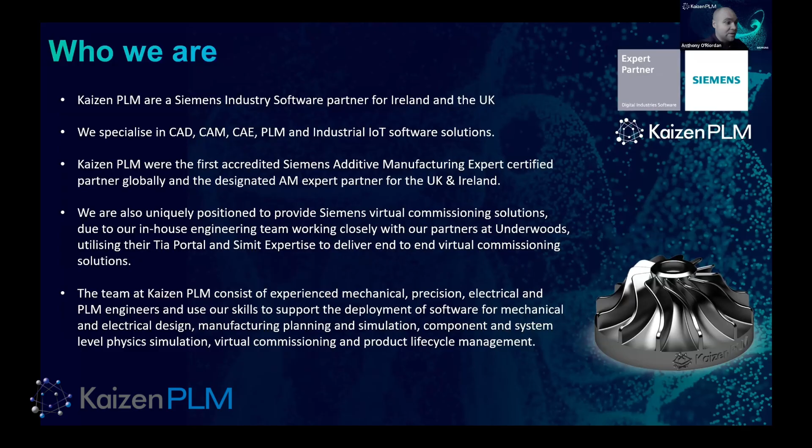So Kaizen PLM, we're a Siemens industry software partner founded in Ireland 8 years ago. We sell and support a range of CAD, CAM, 3D simulation, PLM, and industrial IoT software solutions. So almost any type of software that an engineering company would need. And while we specialize in a few key areas such as additive manufacturing and virtual commissioning, we were actually the first accredited expert partner of Siemens globally for additive design, simulation, and manufacturing software. And we often work with Siemens in their direct accounts to support those additive design and manufacturing software deployments. We are all mainly engineers at Kaizen, and we use these software tools day in and day out.

So just to give you a quick overview of what we will cover today, we are going to start the webinar by giving you a very quick overview of our digital engineering workflows, and then I will jump into some quick real-life examples of part lightweighting. Jay from IMR will then take you through a landing gear torque link design, which Kaizen PLM recently provided to IMR. This was actually printed by IMR on their Renishaw powder bed fusion system. And we're definitely saving the best for last, as Rodrigo Fraga from Siemens will be delivering a story on topology optimized robot grippers, which Siemens have recently commissioned, and they're gaining some popularity in industry as well.

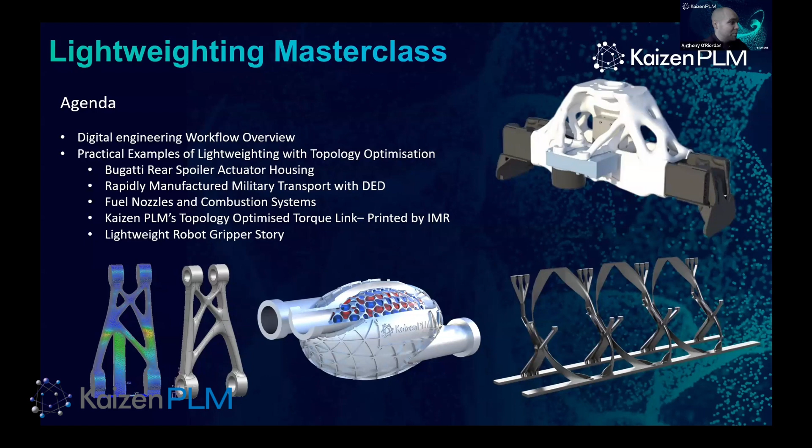So what are the barriers really to industrializing additive manufacturing and digital lightweighting technologies? As we talk with companies across industry, one barrier to industrializing additive manufacturing or digital lightweighting is the reliance upon point solutions for much of their design and manufacturing process.

This becomes a problem because the use of multiple software systems from multiple vendors means reliance upon neutral file formats that don't contain any intelligence. This disconnected process chain means that the final workflow from design to manufacturing is almost untraceable, and it makes it difficult to certify the products manufactured. It is very difficult to ensure that the proper data is being transferred between each step of the workflow when that data isn't tightly managed in a single system.

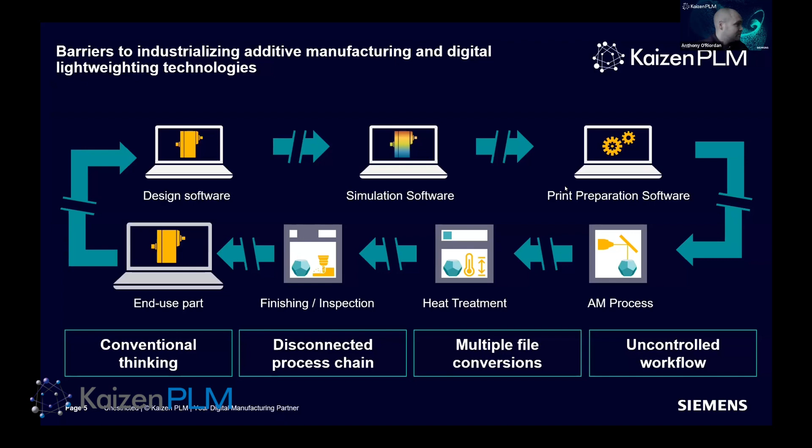To truly get the best return on investment from additive manufacturing or any digital engineering workflow, the design, manufacturing, and quality processes must be part of a holistic digital manufacturing workflow. Such a workflow allows for design data to be simulated, prepared, printed, machined, inspected, and quality controlled, all within the same software system. This is the type of solution Siemens and Kaizen work on, and the type of solution that we deliver to our customer base.

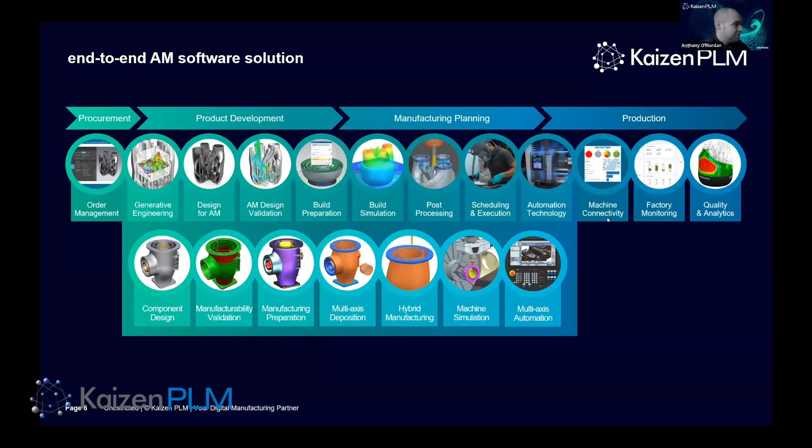So where do you use part lightweighting? Typically, part lightweighting is used in high performance applications. Any engineered application which needs to move or be moved, lightweighting can also benefit. You can quickly design parts which are optimized for lightweighting with the latest digital engineering tools, such as topology optimization. Topology optimization can optimize parts to have a minimal mass while maintaining a defined strength, a defined safety factor, and a defined durability. It's a tool that enables engineers to get to the final design much faster.

Topology optimization isn't just for 3D printing. It can be used for parts that will be cast, molded, machined, forged, or formed. Basically, topology optimization tells you where you need to put material and how much of it. But you will often see the most exotic topology optimization examples 3D printed in exotic materials for the latest hypercar or spacecraft components.

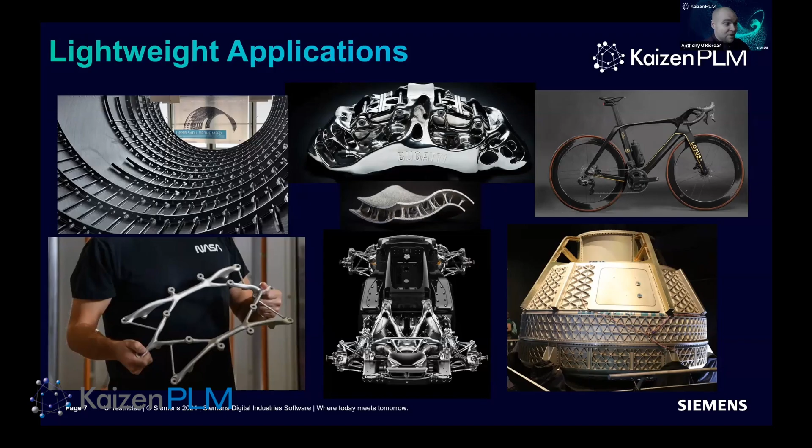And talking about hypercars, that brings us on to our first application. So most of you will have heard of Bugatti, a French manufacturer of hypercars. Their Chiron sports car is the most powerful and fastest production car in Bugatti's history. It can go from 0 to 400 kilometers per hour in just 42 seconds. So they need to keep it light.

So Bugatti was looking for a way to reduce the drag on its rear spoiler while producing a lighter assembly. Their solution was to create a dynamically moving spoiler that employed the best of additive and CNC components, and they employed a wide range of Siemens software solutions to achieve this.

SimCenter was used for aerodynamics analysis to optimize the shape of the rear spoiler and calculate the forces that will be exerted on the brackets when the car is traveling at 400 kilometers per hour. Siemens NX was then used in the same environment to optimize the topology of the parts. A closed loop process for additive manufacturing was then used, where the parts were printed and machined within the same software environment.

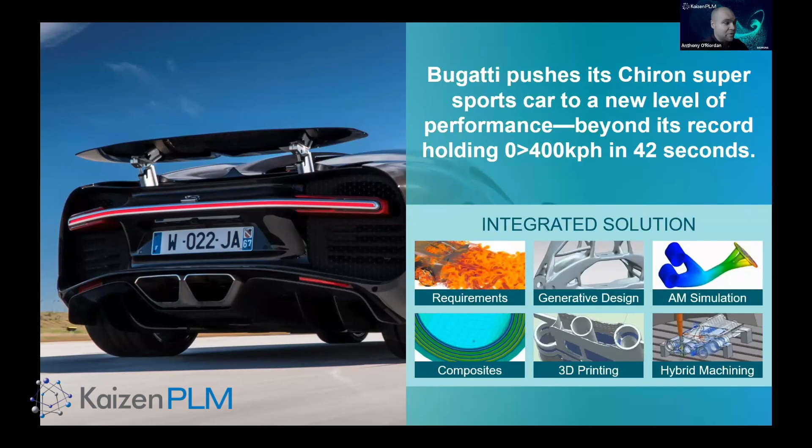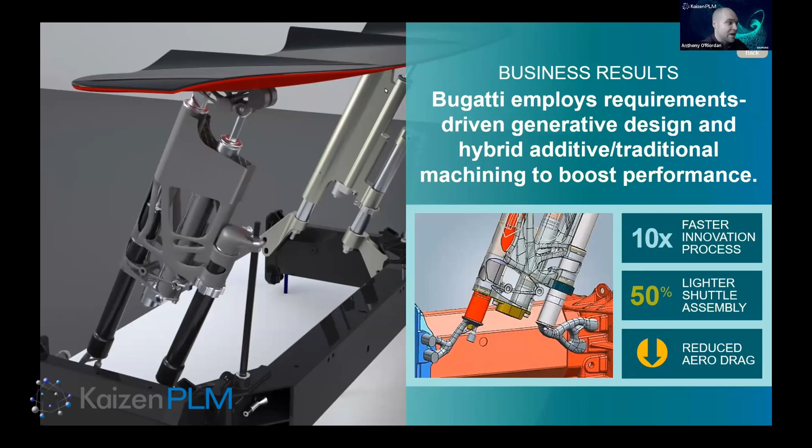Here's an image showing the results. On the left, you can see the 3D printed metal shuttle assembly, and on the right, the traditional CNC machined variation. You can see the difference between the two shuttle systems. This requirements-driven hybrid solution was developed 10 times faster than Bugatti's normal innovation process, and it resulted in an assembly half as heavy as the original, with dramatically reduced aerodynamic turbulence.

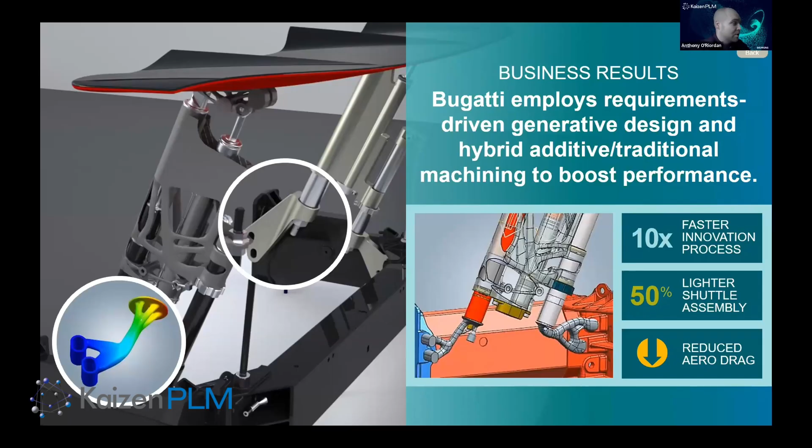Another example of part lightweighting with topology optimization software uses a different type of additive manufacturing: wire arc additive manufacturing, or directed energy deposition. That's a method that allows robots or gantry-based machines to print big metal parts with complex shapes quickly.

Big Metal Additive is a US company, and they're a large-scale metal additive manufacturer, machine maker, and service provider, which mainly uses wire arc additive manufacturing technology. They have an integrated software workflow. They produce high quality, large industrial scale parts, making parts 12 by 12 foot and bigger. What makes Big Metal Additive stand out is its high deposition rate.

In one project for the military, Big Metal Additive was challenged to assess whether it was feasible to use their machine to build a cargo transport near its point of need. They wanted to see if they could do this faster and with less material than conventional manufacturing methods.

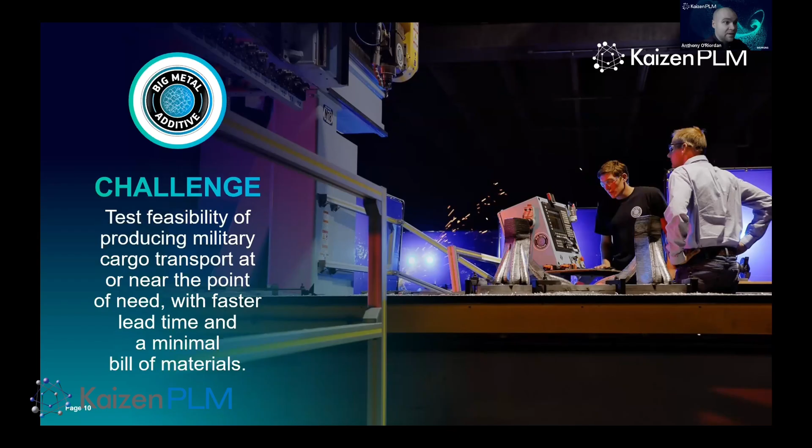So Big Metal Additive used Siemens NX CAM to program their machine. Siemens NX CAM develops all of the tool paths to lay down the metal and controls the deposition head.

The end result was a cargo transport with the passenger seating base you see in the image, built from a 70% smaller bill of materials and with an 80% faster lead time. This leveraged a part design that could have never been achieved without large-scale additive manufacturing, and a part design that was automatically generated by the software via topology optimization.

Siemens, Kaizen, and our customers are designing and printing real production parts that go into safety critical products. The results are very impressive. The parts are often made in less time, they often perform better, they often weigh less, they're often more durable and easier to maintain. The key to getting the correct part performance is having a suitable application backed up by a suitable design and digital manufacturing software workflow.

Here we can see how a gas turbine burner component has been redesigned to reduce 13 parts to 1 part. The part consolidation process also means the part benefits from a 22% weight reduction and a significant reduction in lead time.

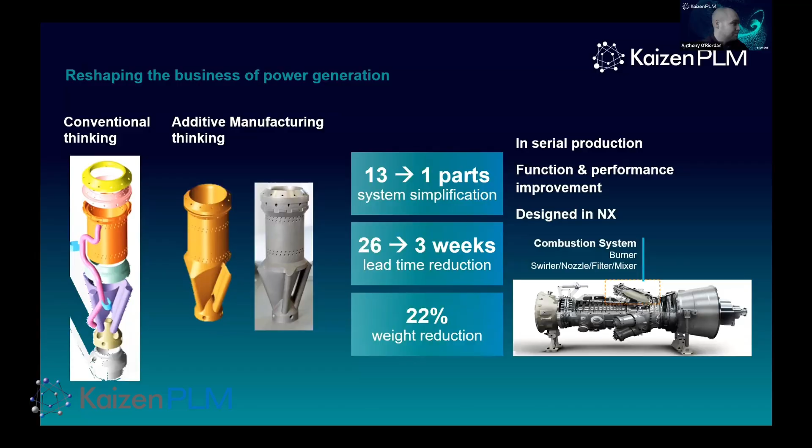Now I'll pass over to Jay from IMR, who will take you through a part IMR recently printed for Kaizen PLM. Thank you, Anthony, for sharing those enlightening examples of lightweighting. My name is Jay, I'm a researcher in additive manufacturing here at IMR, and I'm going to bring you through an example we did with Kaizen, a case study around the torque link.

So first of all, what is a torque link? Well, a torque link is a piece of the landing gear assembly. If we look at the image on the left here, you can see what we call the external cylinder and the internal cylinder, and we can see these two pieces that attach diagonally to each other.

They essentially try to stabilize the rotation of the internal cylinder relative to the external cylinder when the landing gear is in action. If we look on the right hand side here, you can see a GIF of the example where red represents the external cylinder and green represents the internal cylinder. You can see that these two linkages prevent torsion occurring there. So that's what we call a torque link. We have two of these, and they look initially a little bit like this.

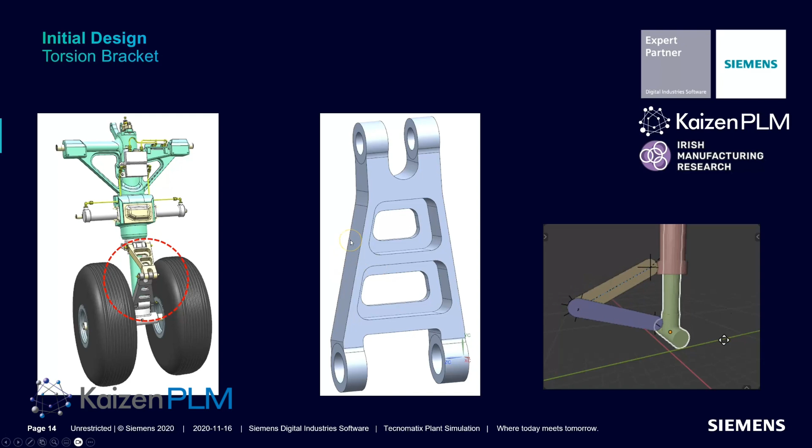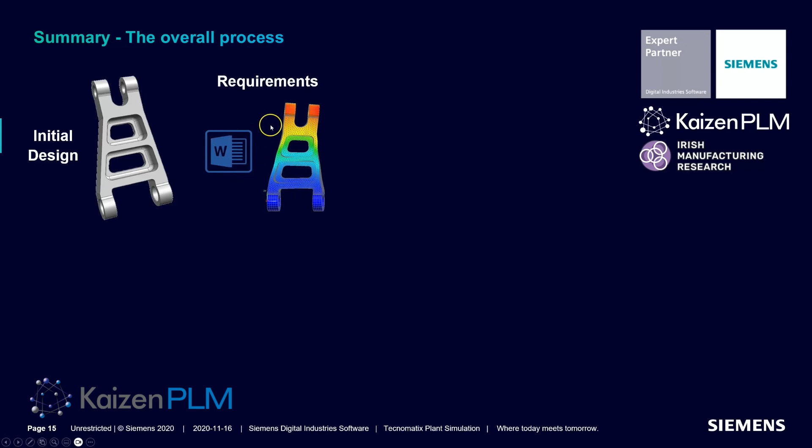So what does the overall process look like for topological optimization? Well, we started off with our initial design—we've already seen where that came from in the assembly. From there, we then look at the requirements, both the loading requirements applied to the piece in use and any documentation standards from governing bodies that relate to the performance of that part. And then we run a process referred to as topological optimization.

So topological optimization is essentially a series of simulations similar to this, where each one iteratively changes and updates the design until you hit an optimal solution. Okay, so by optimal solution, we mean the minimum amount of material left in that part that can still reach the performance standards that have been set by the user at the start of the program and taking the safety factor into account. From there, then we look at doing what we call design adaptation.

Okay, so the initial result can be a little bit raw around the edges. You can end up with extra edges, extra surfaces, errors in the surfaces that become difficult to manufacture. So with design adaptation, we look at this initial design and we either look at editing the design, so taking this part in and editing it so that it can be manufactured, or we may design something around this initial design. Now, when we talk about design for additive, which is the focus of this topic, usually we will augment the design that's been spat out of the topological optimization.

And what we'll be looking to do is smooth down some of the curves, and we might adjust some of the surfaces to ensure that they are manufacturable, add some self-supporting features into the device if needed. Okay. From there, then we take this adaptive design and we run it through a process called validation, where we essentially rerun the simulation that we ran at the start and see that the adaptive design can match the performance of the initial design and the standards. Okay, we may have to jump back and forth between these phases a couple of times until we get the validation right.

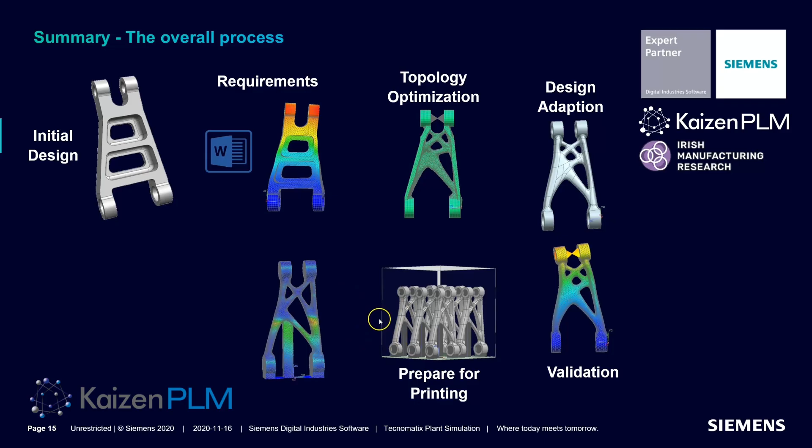From there, then we look at preparing that for printing. So that'll be looking at the orientation within the print bed, setting up all the print parameters of the printer, and adding support structures to the print as needed. And then before we send the part to be manufactured, we also run a distortion simulation where we look at the thermal properties of the material, the heat that is being put into the material during the print process, and ensure that no hotspots occur that may cause a defect to occur in the part, a failure to occur mid-print, or distortion to occur to the part post-print. And the final stage is to send that part to be manufactured and post-processing.

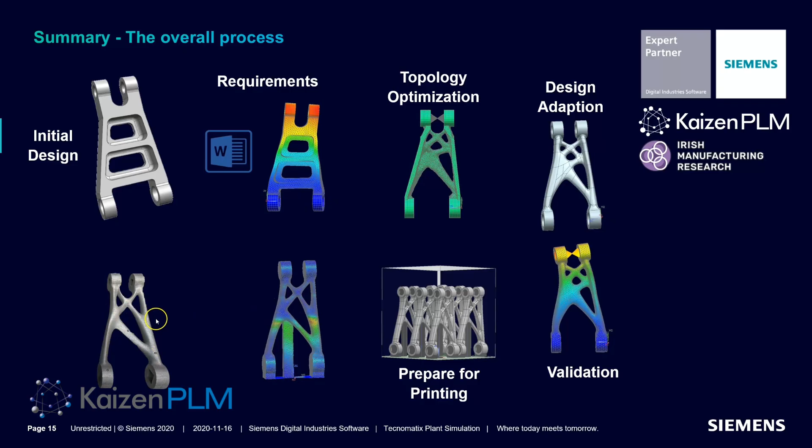Right, folks, I'm going to talk you through a little bit about how the topological optimization process works. Okay, so if you have a look at our part, we call this the design space. And that refers to a simplified version of the part. What we've done is we've actually removed some of the main features from the part, which is specifically these cutouts, and we've left in the features that are really important, which is the linkages. And then we've created a boundary as well, so that we say that no material can be added outside the footprint of the original part, because this part has to go back into an assembly that already exists.

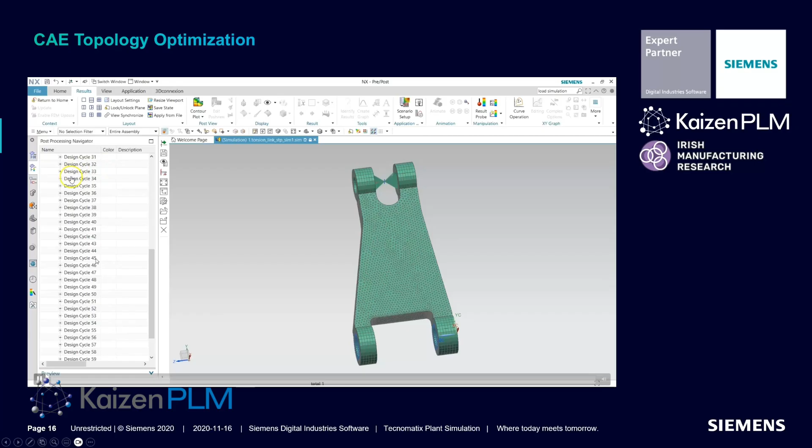Okay. From there then, with those constraints in place, what we do is we run iterative simulations where the material in this design space that has the least force or stress going through it is removed iteratively until we reach a solution where no more material can be removed without compromising the structural integrity of the part. So what that looks like then, this video will show where all of these solutions are. So each of these design cycles represents one of those iterations of those simulations. And when we turn the simulation view on, we can see that the red represents the material that is kept and the blue represents the material that is removed.

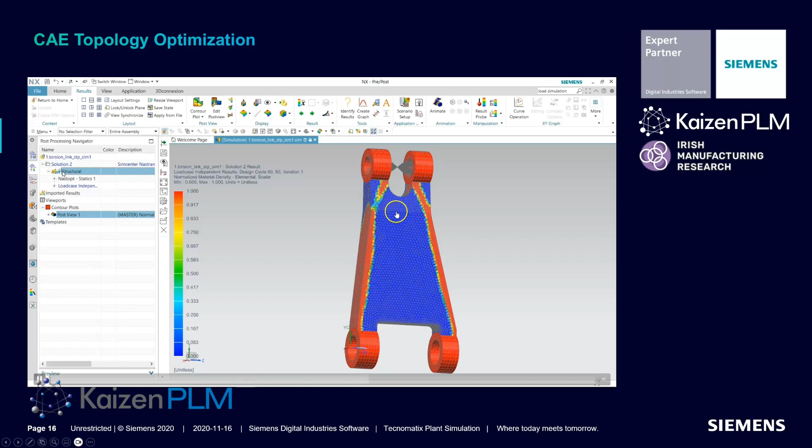Okay, and if we change the view on that then, just give it a second to spin it around again for us. What we'll see is when we change the view, we can see what the actual material that's left looks like. And there we are. This is the raw result from the simulation. Now, we can see that the surfaces are quite noisy on it. So what we do is we apply a smoothing filter to that. And then we export this body back into our CAD model where we can look at doing some adaptations to it.

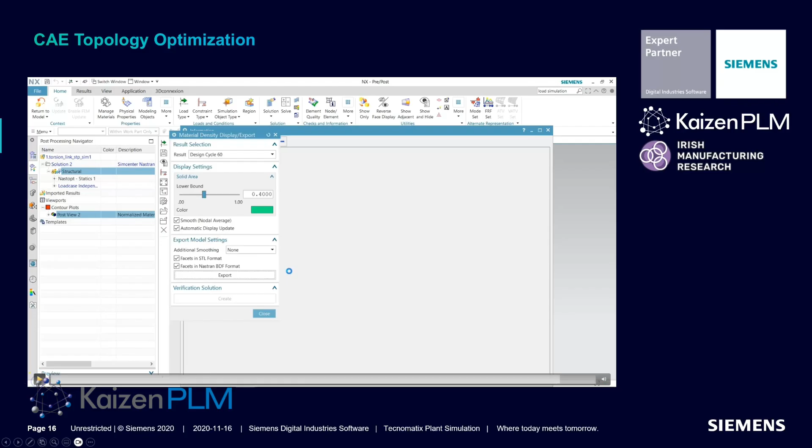Okay, so what do we do next? Well, we can see that we've got some sharp edges on this part, which might cause some stress concentrations. We've also got some rough areas on the external surfaces of the part as well. So what we're doing during the adaptation phase, we're going to smooth out those surfaces. We're going to maybe remove those sharp corners, and we'll try and remove any corners around the linkages as well to prevent stress concentrations occurring at those points.

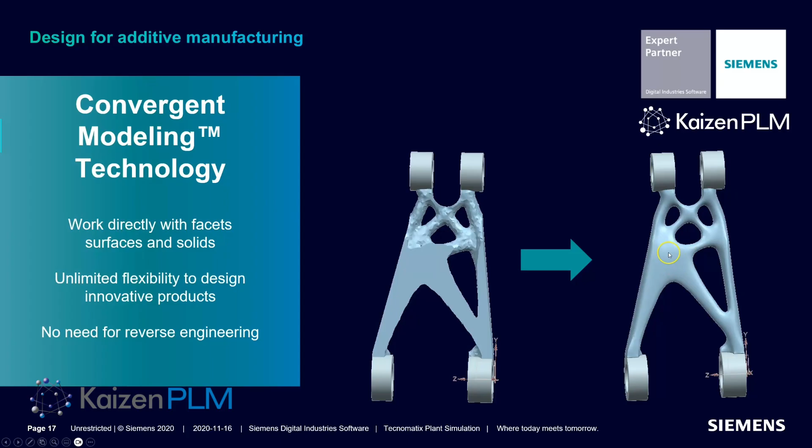Essentially, we're just adapting that model, and then we'll make sure that all of the areas within this part can be 3D printed. From there, what we need to do is to run a validation simulation on this part and ensure that this part is meeting the performance standards that we had from our other part. And what we can see from the results of the simulation is it does. We're seeing that the maximum displacement is 0.33 millimeters, which matches up with the initial simulation that was carried out at the start of this project.

But what we're also seeing is the total mass of the product is now coming out at 0.51 kg or 510 grams versus the original design, which was 920 grams. We're seeing about a 45% reduction in weight. And while that 45% represents a 410 gram reduction in weight for this component, first we have to take into account that there are two of these components in the assembly.

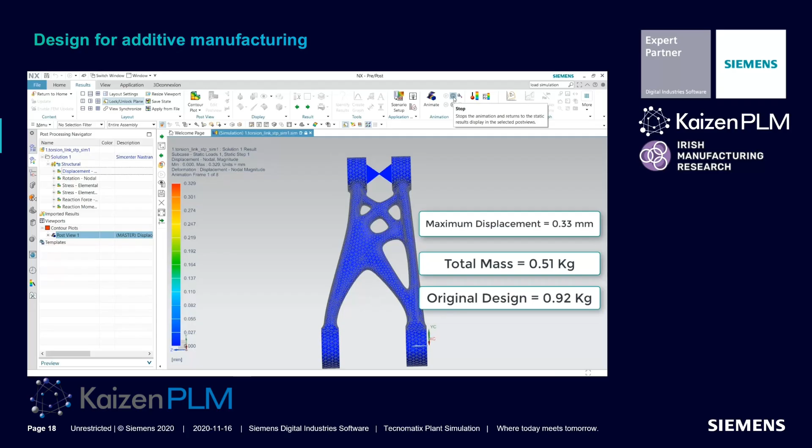And second, we think about the entire plane as a whole assembly and all of the other components that can be optimized. Very quickly we can see that those little weight reductions can stack up across an entire airplane, particularly if we take the lifetime of that airplane into account. What we can see is substantial reduction in weight for the airplane, which means substantial reduction in the cost of transporting that airplane and a corresponding reduction in the amount of fuel that is being consumed by the plane when it is moving.

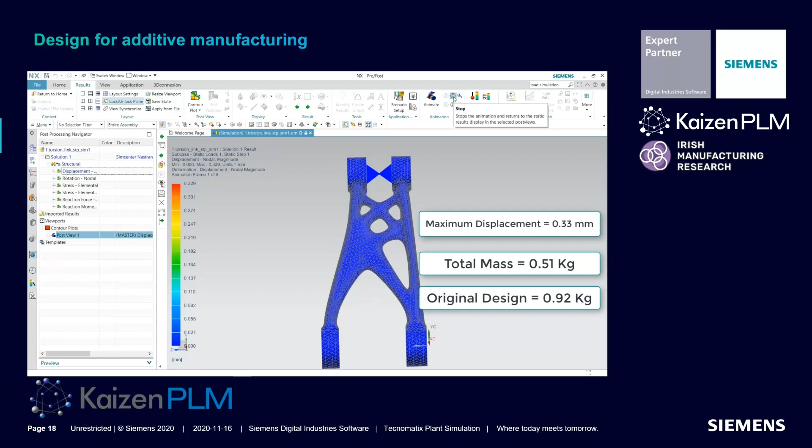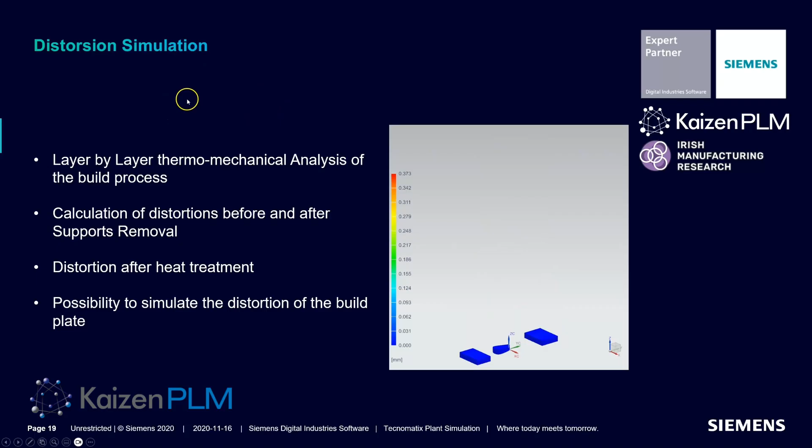So the final phase of this project, before we look at manufacturing, is the distortion simulation. What we're really looking for here is any indication that the print might fail, as we don't want to have to rerun the print and we don't want to damage our machine. And also any indications that the part itself might contain defects or might distort during printing. If we see those, we can make adjustments to the design and rerun this thermal simulation prior to manufacturing. And that will save us the cost of any material that is wasted or any damage to our machine.

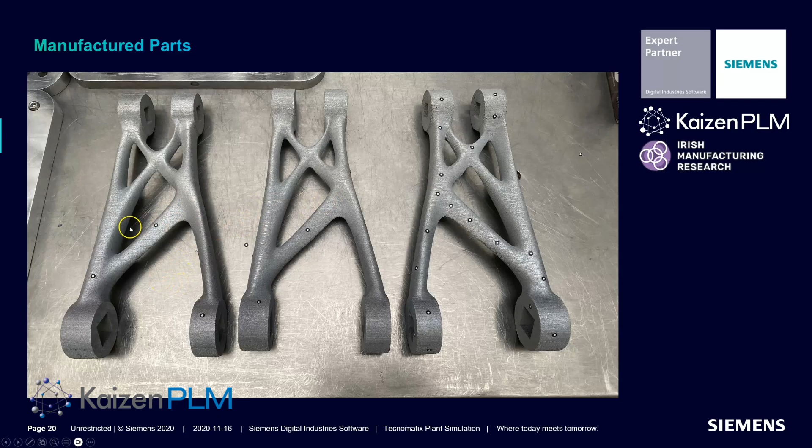So the final slide here just shows you our final parts manufactured. And what I'll do now is hand you over to Rodrigo, and he will give you an example of a robot end effector, which is really, really exciting.

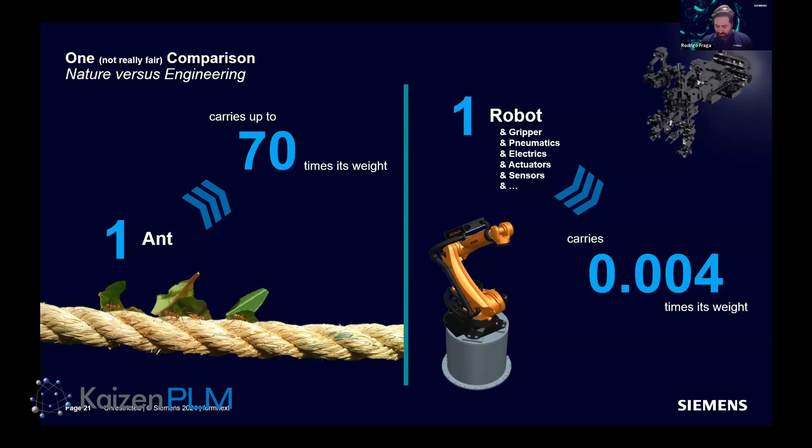When we check why to start working on a gripper, for example, it's about the weight that we want to move, absolutely. But considering that we are not going to change the component itself, we have our robot, our system, and we are not going to change the system as well. So the gripper, I would say, is the first option that we can start investigating: how we can make this gripper more efficient. More efficient means maybe to reduce the mass.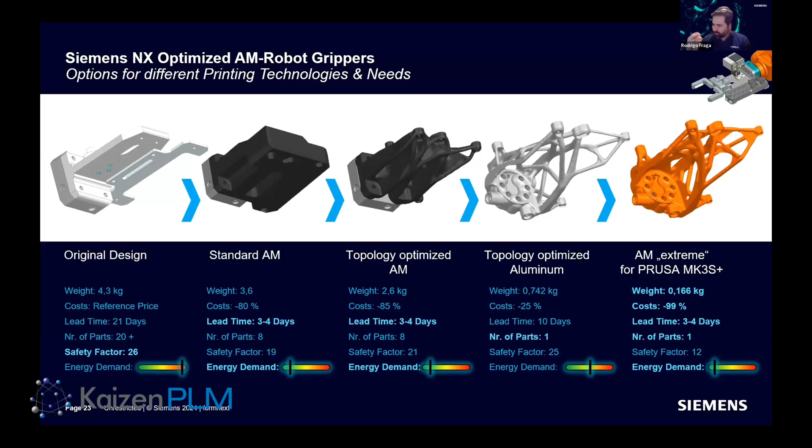Some more information about why to use additive. So when we start to think about lightweight, we are talking about precision tools or components where every gram is important. And when you use simulation, like topology optimization, for example, to guide you to discover new designs, usually you will end up with a very organic and complex shape. So shapes which you can only produce using additive manufacturing. For sure, you have to adapt this shape depending on the process, depending on the technology you're going to use. But usually those shapes are impossible to produce with any other traditional manufacturing method.

So additive is very important as well when you start to work on specific components, like when you have a high number of variants. So you think about how to individualize these components, and additive is perfect for that. You don't have a massive production, but like in the case of a gripper, depending on the component you want to move, depending on the robot interface you have, you will adapt that design for that very specific situation. This also makes it very easy to deal with spare parts. If a gripper breaks, you just print a new one, or partially a new one, which decreases the lead time to produce a gripper, as you saw in the previous example.

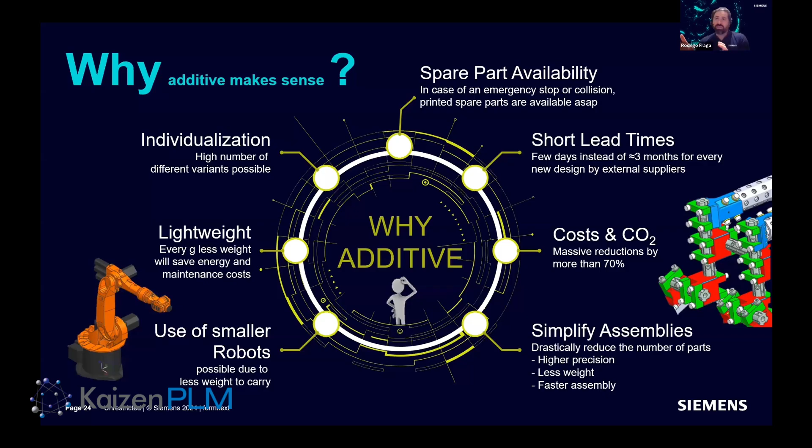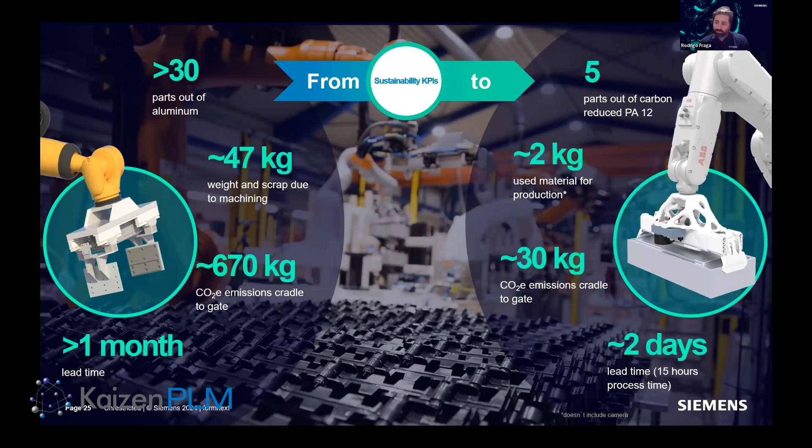So you see, with this kind of redesign, we're not only able to save energy costs, lead time, CO2 emissions, and so on, but it's possible to change the robots that we're using. Once the change of the gripper impacts a possible change of the robot, you can start to rethink about the layout of your plant as well. Small robots means more robots on the same space, so you increase the production of your line.

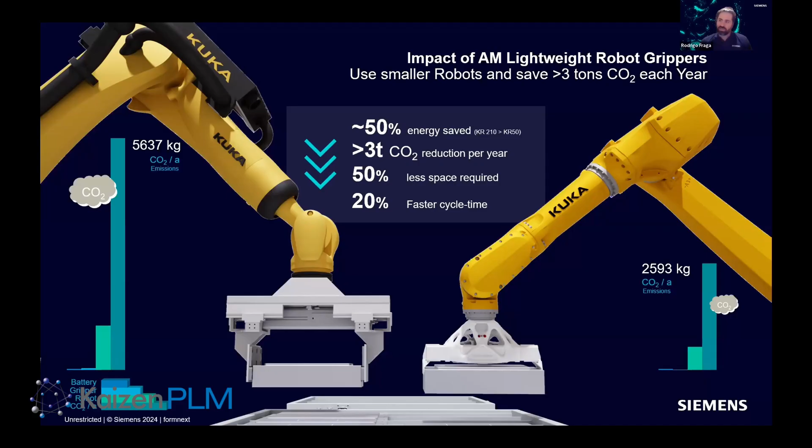So again, you can zoom out, see the big picture of your whole process, and take into account that one component can impact a lot during the whole process. I want to show you this example of the battery gripper to show how our solutions from Siemens can help you develop this kind of component, or any other component, in an integrated way.

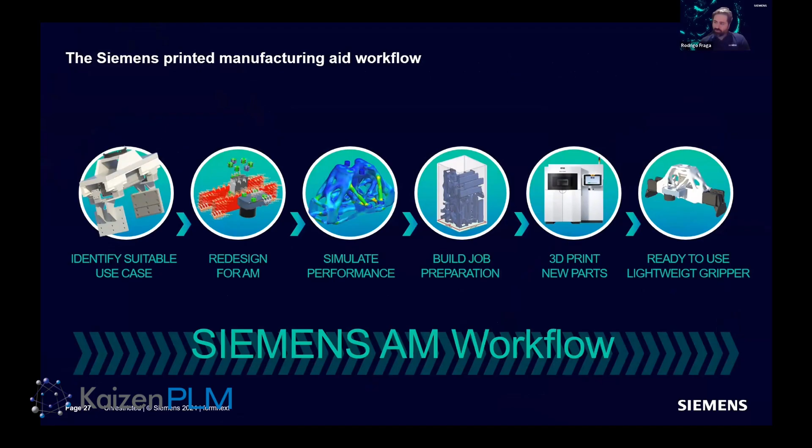Starting from the concept of the component itself into the production, first step, as Jay already said previously, it's important to establish very well your requirements. I think this is probably the most important step. You have to understand what you want, and you have to be clear about what you want. So what are the functional requirements of this specific component you're going to redesign?

What kind of performance do you expect out of that? What are the KPIs which will help you decide if additive manufacturing is a good decision to produce this component? So you have to understand all the details.

And also you have to understand all your boundaries. What materials can I use? What technologies are available for me to print this part? Can I use only an FDM machine, or can I go for SLM, SLS? Can I print in metal? Can I print only in polymer? Depending on what options you have, you'll have different requirements. This is extremely important to be established from the beginning.

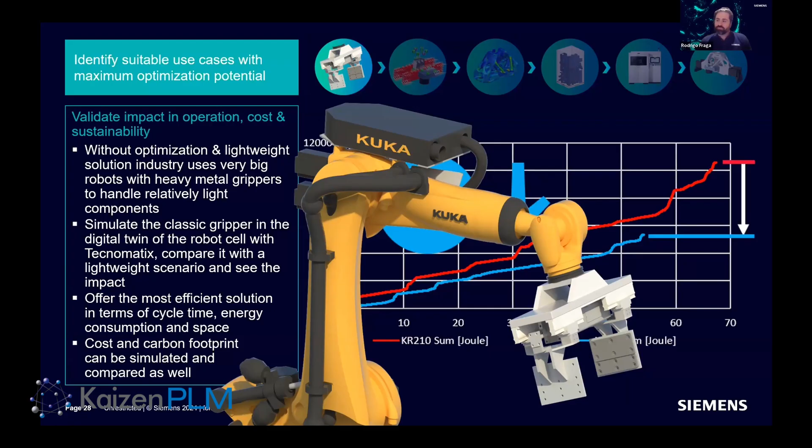So knowing basically what you want, what you expect, and in this specific case, we have to know what loads are acting on the components we want to design. We take into account all these functional requirements and put together what we call the functional parts—the battery, all the sensors, the actuators, which will be part of this small assembly. And you see the next step, this big pink block, which is our design space.

Then we can start to use topology optimization solution to guide us to discover a new design. Given this design space, the boundary conditions, the different constraints and requirements, the objectives, the solution will help us identify the load paths, the energy paths, and basically, based on this given design space, where we have to keep material.

Topology optimization is an iterative process. Most of the time you have to do multiple loops, adjusting your setup until you end up with a good shape. And it's important to have a validation tool working together—you design, you validate, until you get something you judge as decent.

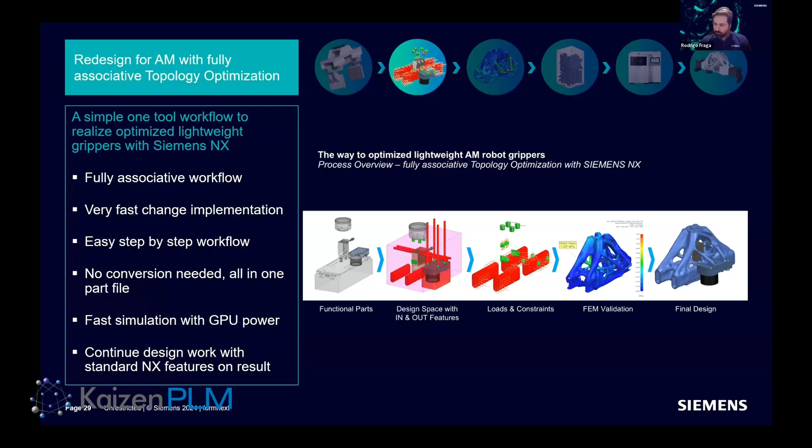What's possible, and I really like this example, is if you start redesigning a part using topology optimization in NX, our solution from Siemens, it's possible to capture this design workflow inside the solution. You can create out of this a kind of parametric model where you can adapt the design workflow for different needs, depending on the parameters you want to use.

As I said, you know what you want, you know the functional requirements, and you can transform these functional requirements into parameters inside the solution. This means I can adapt the dimensions for a specific attachment, the specific flange on my gripper for different robots on my plant. It also means I can change the functional requirements depending on the size and weight of different batteries I want to move. So you capture everything.

We also have a low-code solution called Mendix. If we connect NX, capturing this design workflow inside Mendix, you can easily order your grippers from this application, from your phone, from your tablet. So you capture the workflow inside the design tool. Then, working on a plant, if you're responsible for maintenance and see that you need a new gripper, it's easy to start the process.

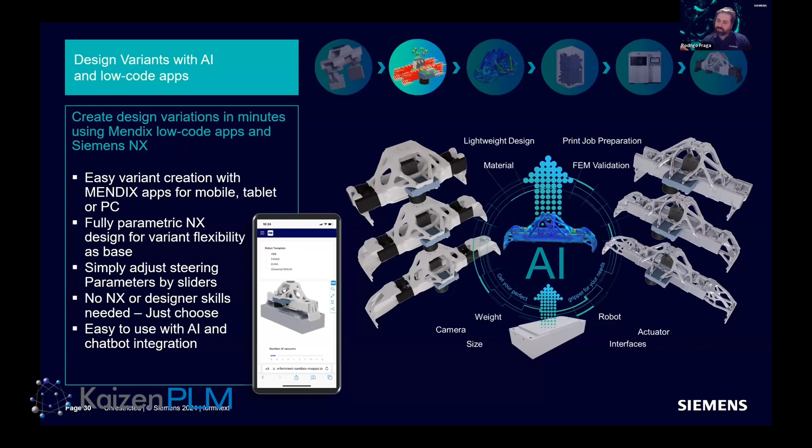You have the workflow already captured. You just select the robot, give the dimensions, or the requirements of the part you want to carry. Then the solution, with this captured workflow, will design and launch, sending to the machine, for example, a new print job to produce a new gripper for you.

Once we finish the design, it's extremely important to do a validation. Sometimes we cannot capture all the functional requirements in a topology optimization process. That's why it's important to work together with a more capable simulation solution, where you can do virtual testing of your parts for the different needs or requirements you can have.

For example, you design your part applying the loads you want, taking into account the stress factor you want to minimize, or targeting a specific stiffness, but you cannot capture a durability requirement as part of the topology optimization.

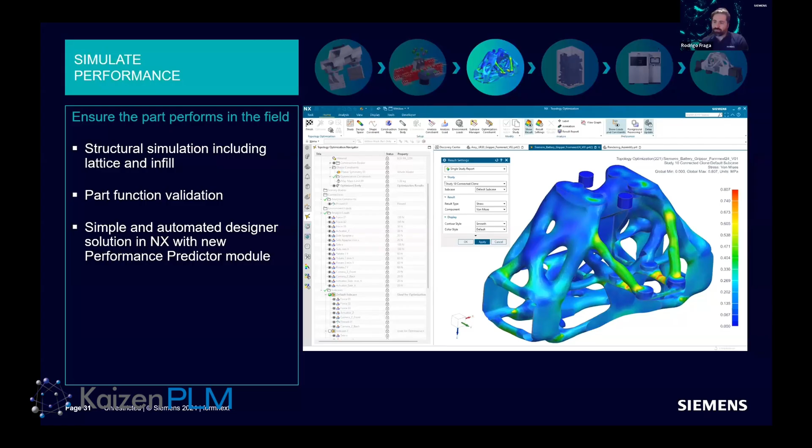So using our solution, which has everything integrated, you can just switch the module and do a durability analysis, for example. This is very important because then you don't waste time and money producing prototypes and testing parts which will not perform as expected.

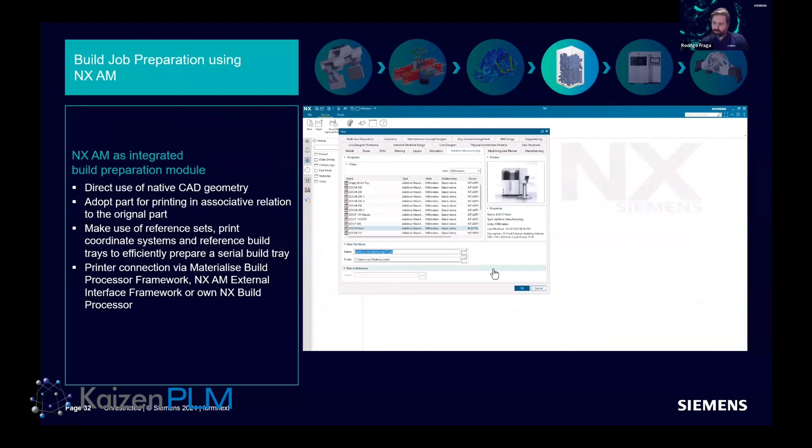Once our part is virtually validated, so we know it's going to deliver the expected performance, it's time to switch to the additive manufacturing application and start to build our print job. In this case, we are doing a 3D nesting on the build volume we have available from the machine we are going to use.

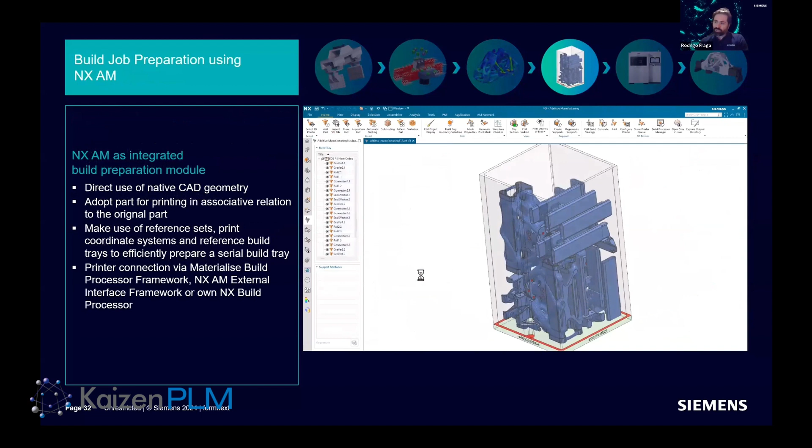You can see here, in this example, we can print maybe 2, 3, or 4 grippers at the same time, in the same volume. This also helps a lot to save production time and minimize lead times.

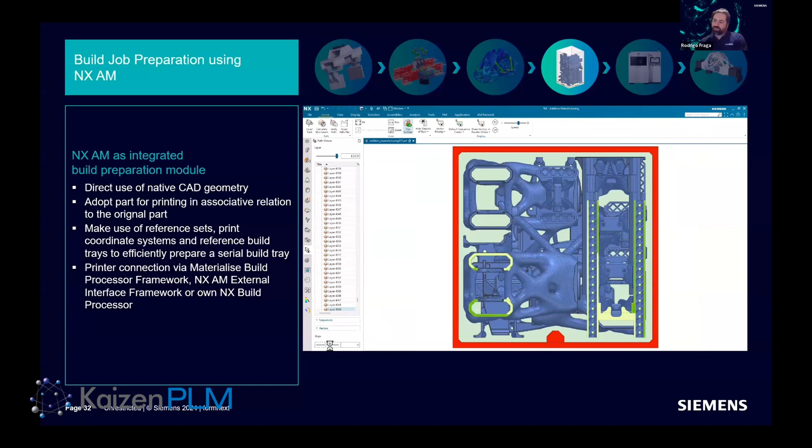Within our solution, you can do all the build preparation steps needed to guarantee that your part will print right the first time. You can check all the details, make all the assignments, correct positions and so on, to make sure that once you generate the print job and send it to the machine, everything will be printed as expected.

We are taking into account everything important as part of this process, all the mechanical properties of the materials we have. We are checking and doing the 3D nesting as well as possible, to really pack a high number of parts.

You see nice results here, like a 34% reduction on cost, increase on productivity, and so on. These are the things that will help you decide whether to use additive manufacturing for a specific case. Yes, it takes time to redesign your parts and investigate new possibilities, but then you get extremely nice benefits in the end.

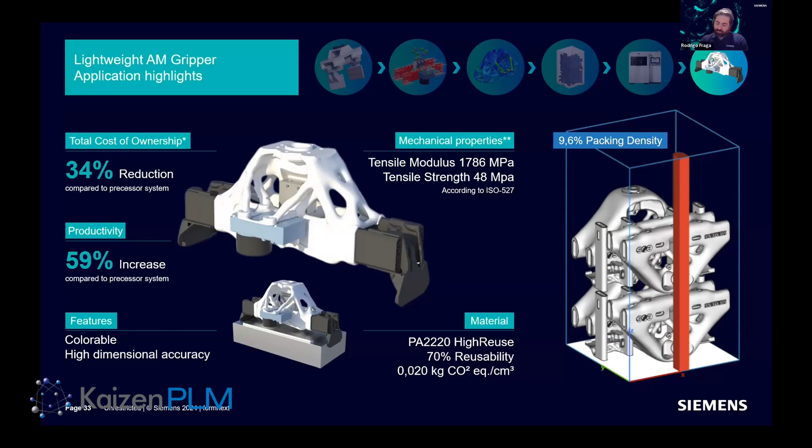Let me show you this gripper in action. You can see here, in this example, a battery of 25 kilograms, if I'm not wrong, being moved by a big robot.

Initially, this was a gripper of 47 kilograms. It's a very precise gripper, which works very well, produced out of additive manufacturing.

If you have to adapt something as part of this design, it's very easy to do. We had situations where we had to change the angle of the cameras we have, or apply a new sensor. So you just go back to your topology optimization study that you have created, start to adapt the design to receive these new components or change their size or weight, and easily you have a new design created.

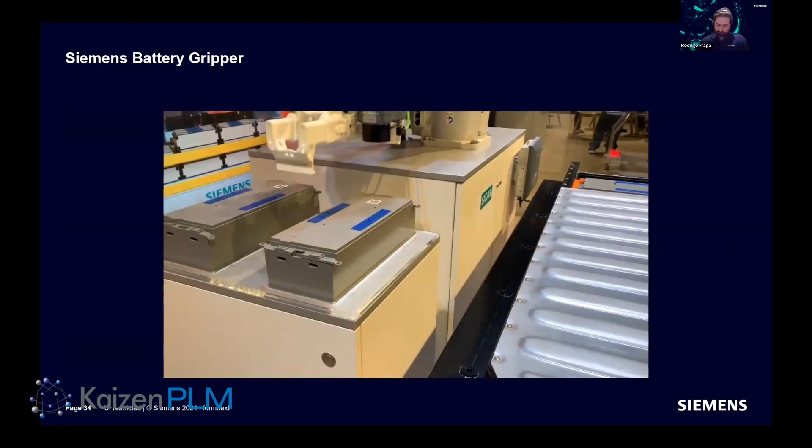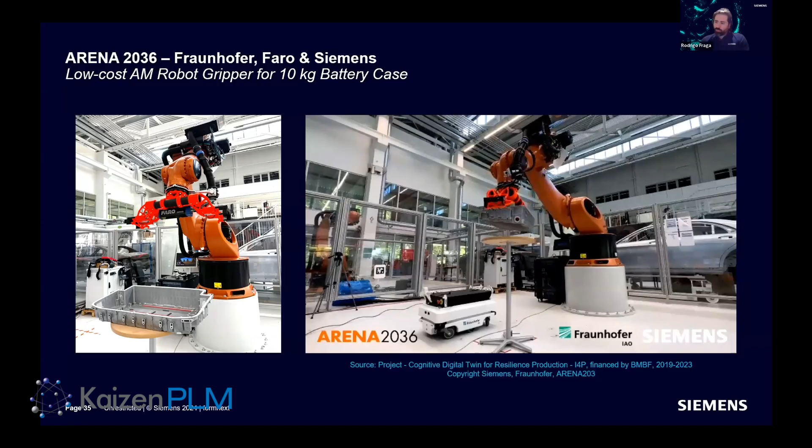I hope this could give you some inspiration to think about how to apply additive manufacturing to your components, to your products. Thank you very much for attending this session.